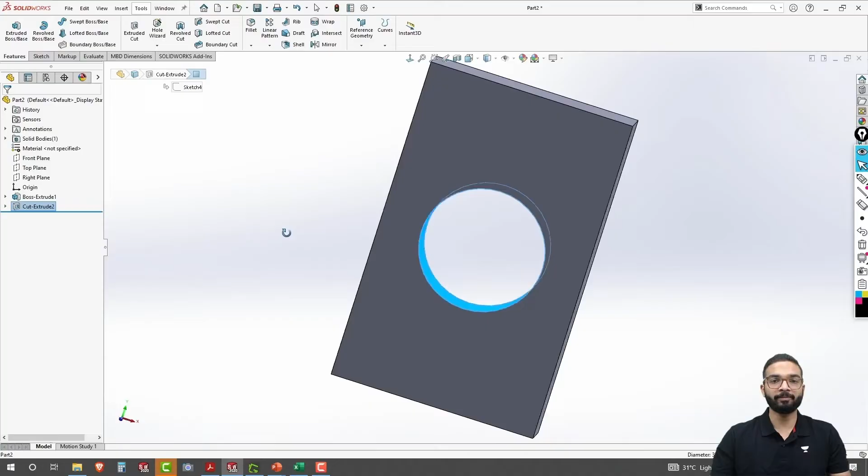In this video, we would be taking a new exercise. This exercise is a very interesting one. Let's move forward and take a look at our 3D model for this exercise. You can see here that we would be modeling this intake manifold used in automobiles. Let's not waste any time and get started with SolidWorks.

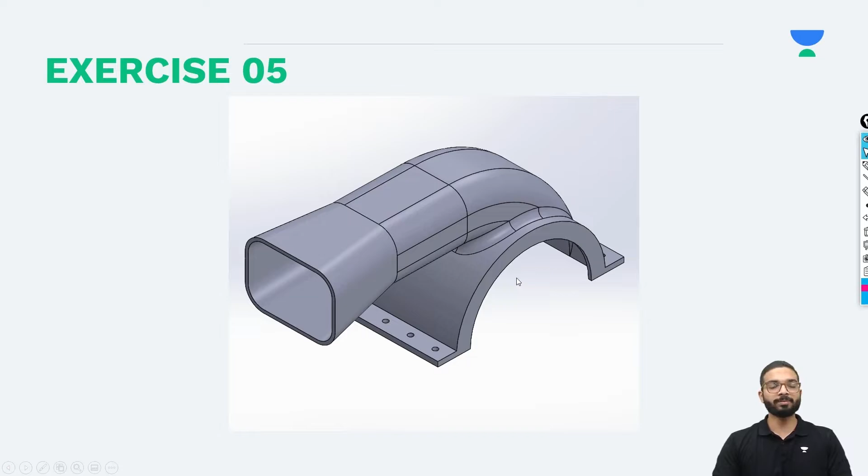We will launch SolidWorks and begin with our modeling. For this, first I would be sketching on the right plane. I will click on the right plane and select Sketch. Next, I would be first creating a circular profile from the origin, like this. I will give this circle a diameter of 120 millimeters. I will enter 120 and then press the Enter key on my keyboard.

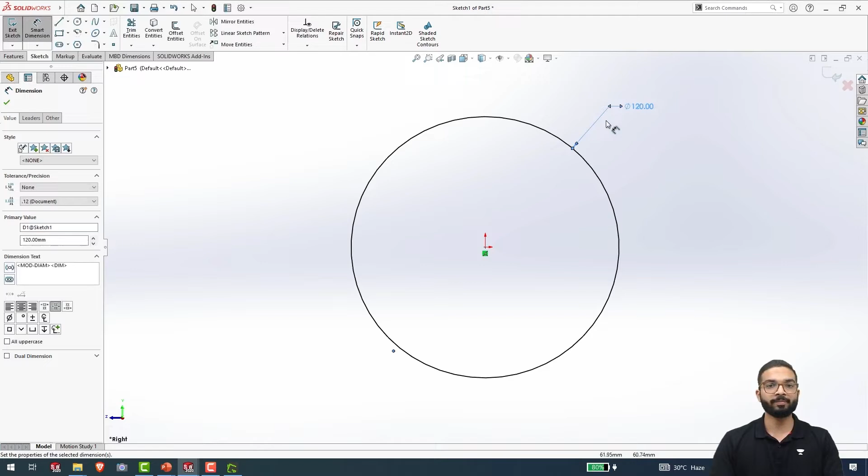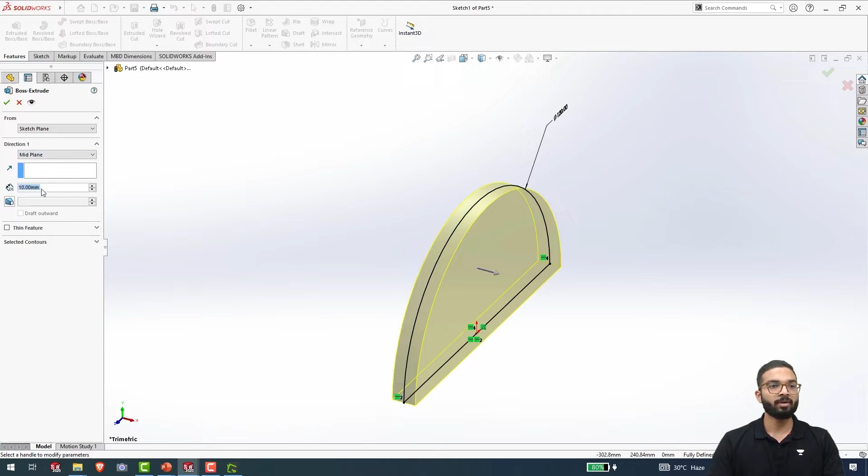Next, I will create a line horizontally connecting these two reference points over here and then press Escape. I will trim off the bottom portion of the circle because we want only this part to be extruded. Once we have done this, we will go to Features and select Extruded Boss Base. We will now extrude this profile from the mid plane for a distance of 80 millimeters. We will click on OK and you can see that our surface has been generated. This is our first feature.

Now again I will go to the right plane over here and sketch on it again. I will press Ctrl 8 and then set it normal to the screen. Next, again here I would be creating a new circle, going to Smart Dimensions and then selecting this circle and give it a dimension of 97.5 millimeters. I will press the Enter key and add my dimension. Once I have defined this circle, I will press Ctrl Q and then exit the sketch. Why this circle was drawn, I will show you in a while.

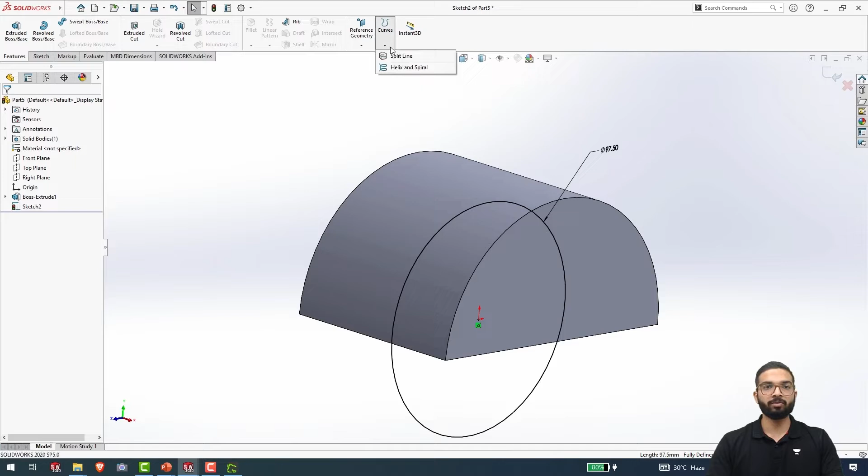From Features, we will go to the drop down of Curves. We will first exit the sketch mode by pressing Ctrl Q. We will go to Features and from the drop down of Curves, we will select Split Line. And from these options of split, we will select Projection. Now here it is asking what line do I want. This is the line or sketch that I want, and here it is asking what face do I want to split.

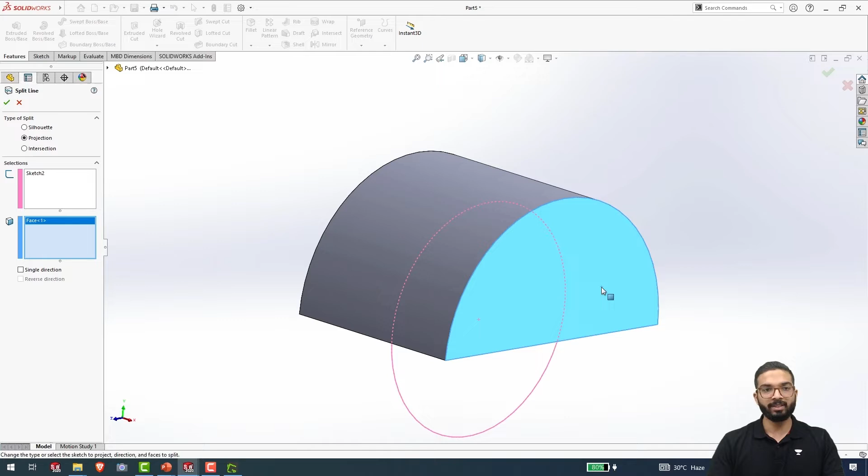I will say this face, and when I click on OK, you can see that this face has been split about the line I showed you before. You can see that now these two are different faces. Why we did this, I will show you at the end of our 3D modeling. But now let's move forward and create the intake manifold.

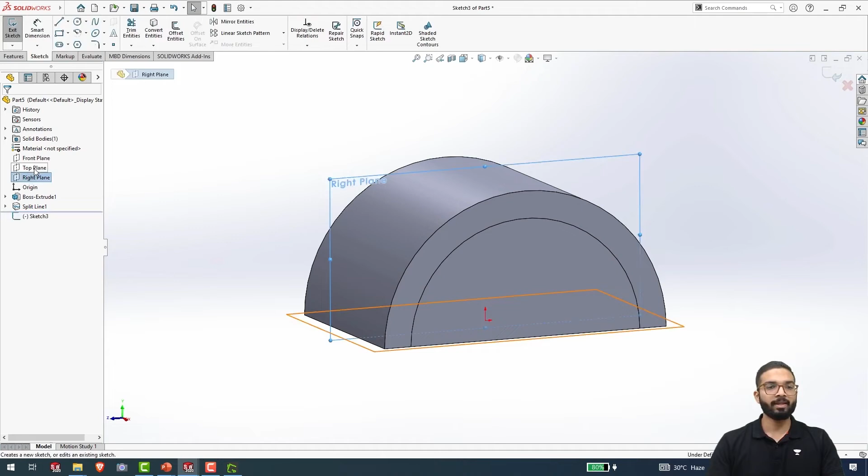Now I will again select the right plane and then sketch on it. I will press Ctrl 8 and then set it normal to our screens. From here, I will create a 3-point arc like this, starting from this point over here. Second point would be there and my third point would be somewhere over here. Next, I will give this arc a radius of 100 millimeters like this, and then by pressing Escape, I will select this point, press Ctrl key and select this edge over here and say Make Coincident.

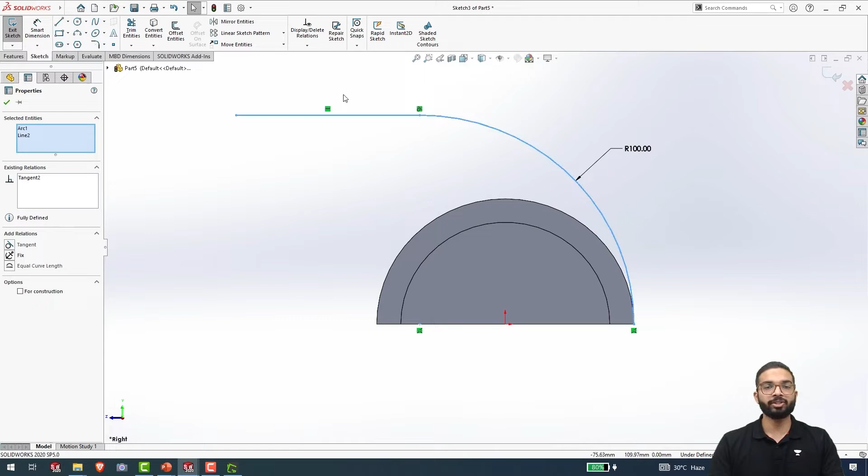Once I have done this, you can see that my arc is now defined. Now I will select the line command and create a horizontal line and then press Escape. I will select both of these entities using the box selection and then say Make Tangent. Once I have done this, I will specify this endpoint over here from our center, which is at a distance of 81.5. Once I have entered this and defined the sketch completely, I will now press Ctrl Q and exit the sketch and also rebuild my part.

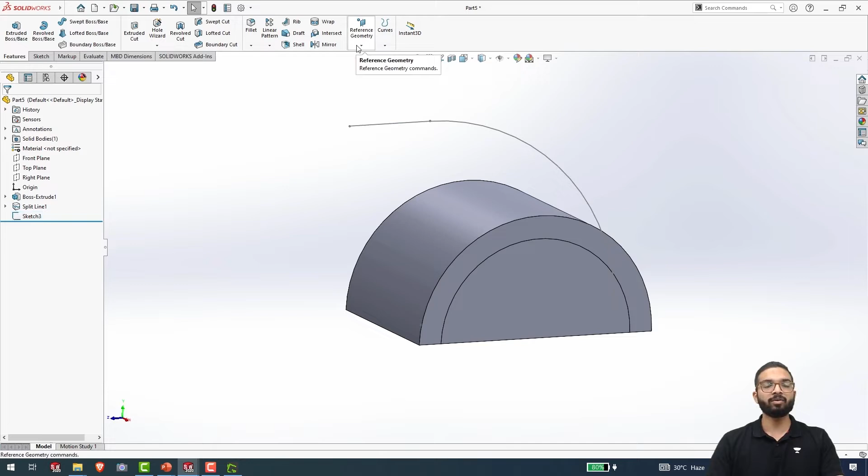For the next step, I will create a plane at this intersection using this line as my reference. For that, I will go to the drop down of Reference Geometry and select Plane from here. My first reference would be this line and my second reference would be this point over here. You can see that the preview of the plane is being shown. I will click on OK and then generate this plane.

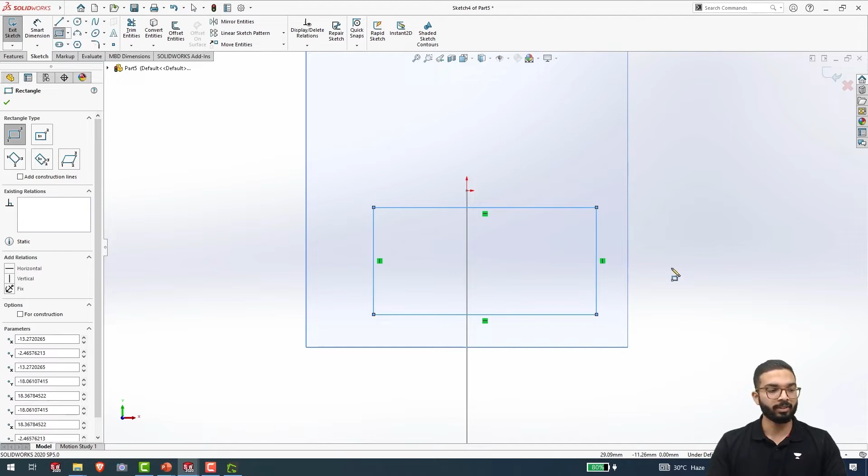Now I will select this plane and start sketching on it. I will press Ctrl 8 and set it normal to my screens. I will zoom in a bit over here, select a corner rectangle and create a corner rectangle over here. Now I will give this the dimensions. The dimensions for this line are 57.5. I will enter it and then give this dimension of the rectangle as 42 millimeters.

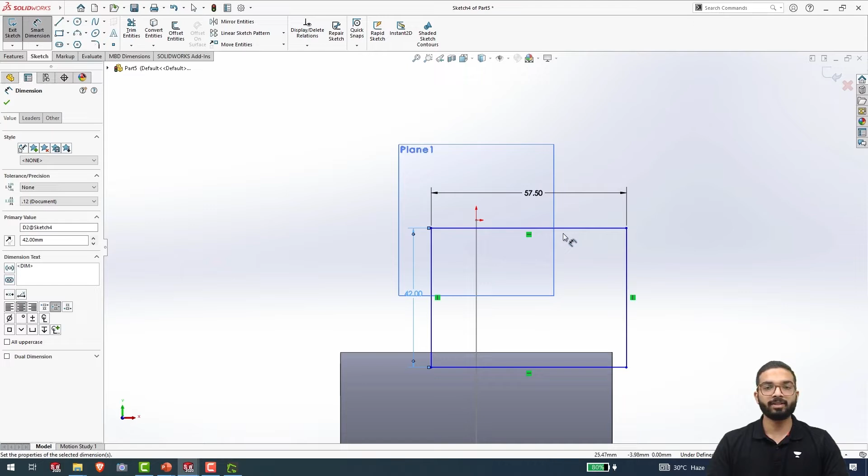I will press Enter and you can see that my dimensions have been added. Now I just have to simply define the sketch. I will press Escape, exit the command. Now I will right click on this line, select Midpoint, press Ctrl and then select the origin over here, and here I will say Make Pierce.

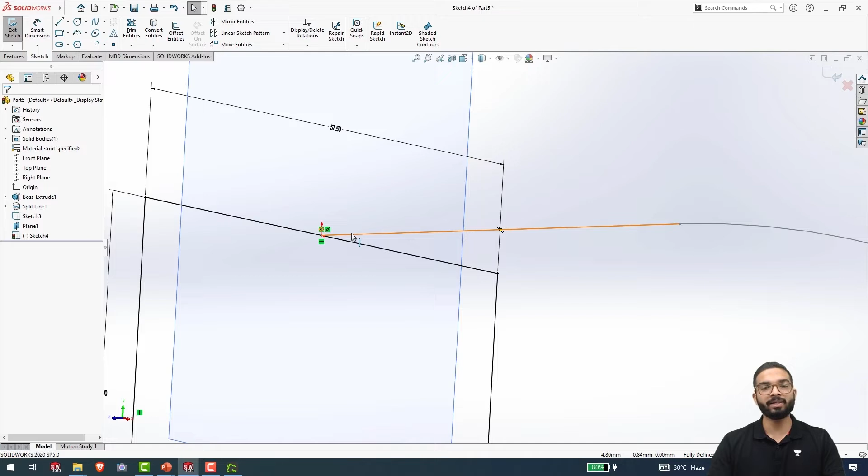You can see after adding this sketch relation, my sketch is now completely defined. What it did over here is that it pierced the center point of this line on this sketch, on this line that we had created in the previous sketch. You press Ctrl 8 and you can see that this is how my profile is looking.

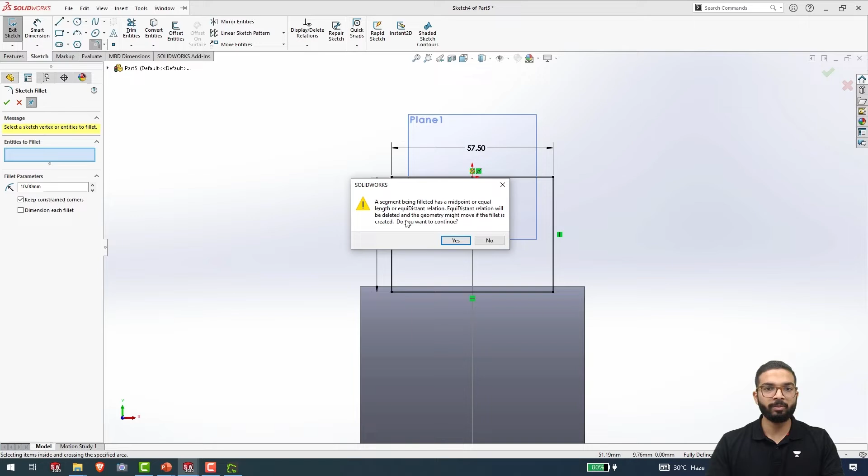Now I will go to the sketch fillet over here, and then by using box select I will select all of these. You can see that it is showing me a message: a segment being filleted has a midpoint or equidistant relation. The equidistant relation will be deleted and the geometry moved if the fillet is created. We will say yes, again we will say yes, and you can see that it has selected all the edges where a fillet would be applied.

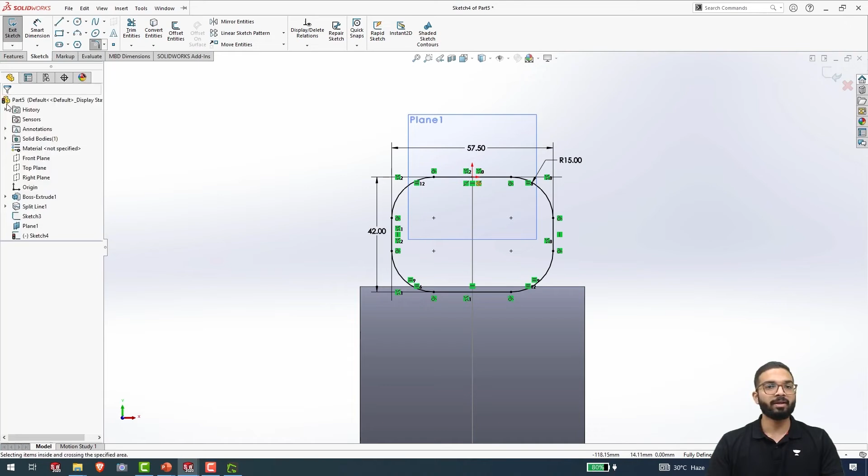Here I will enter the value of my fillet, that is 15 millimeters. I will enter 15 and then click on OK. You can see that my fillets have been added. I will click on OK and then press Ctrl Q again in order to exit the sketch mode and rebuild our part. Once this has been done, I will show you how to use the sweep feature.

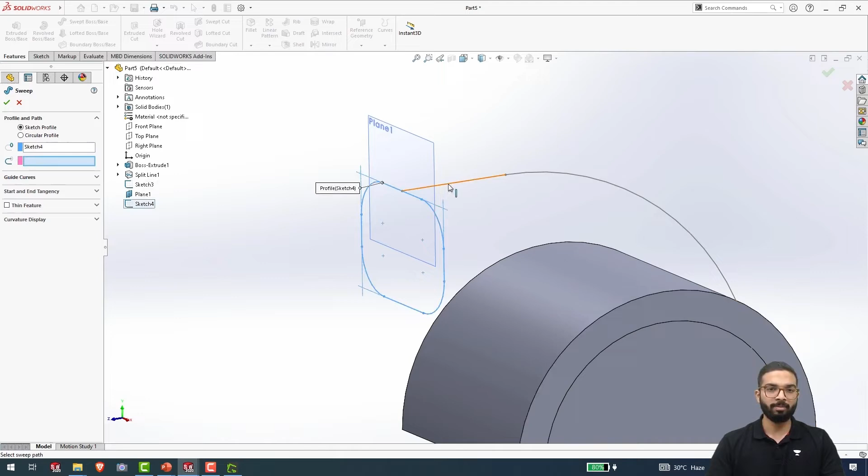I will select swept boss base from here, and the first input that we have to give is our profile. We can select it directly from here. You can see that the sketch has been added, or else I can clear selection and then select the sketch from the drop down. Next it is asking for my path. I will select this. You can see it is showing us a preview of how our sweep would look. Now that we are okay with this sweep, we will press OK and generate this sweep.

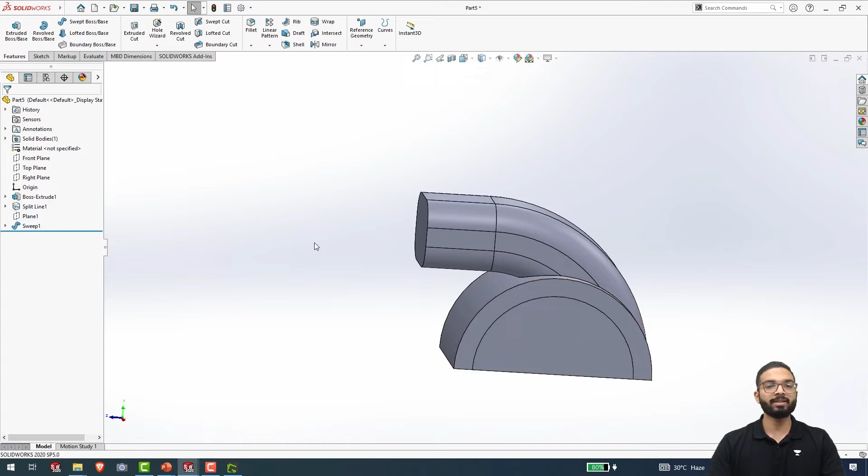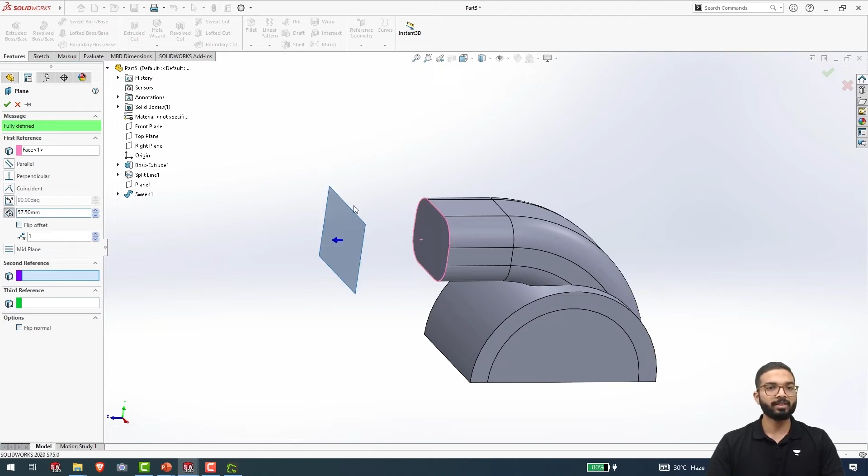Next I will create this front part over here. Before moving, we will hide this plane as it no longer serves any purpose. Now I will create a new plane offset from this face. I will go to plane and you can see that as my face was already selected, it created a plane at a distance of 10 millimeters from it, but we want it at a distance of 57.5 millimeters. You can see the preview of the plane. I will click on OK and generate this plane.

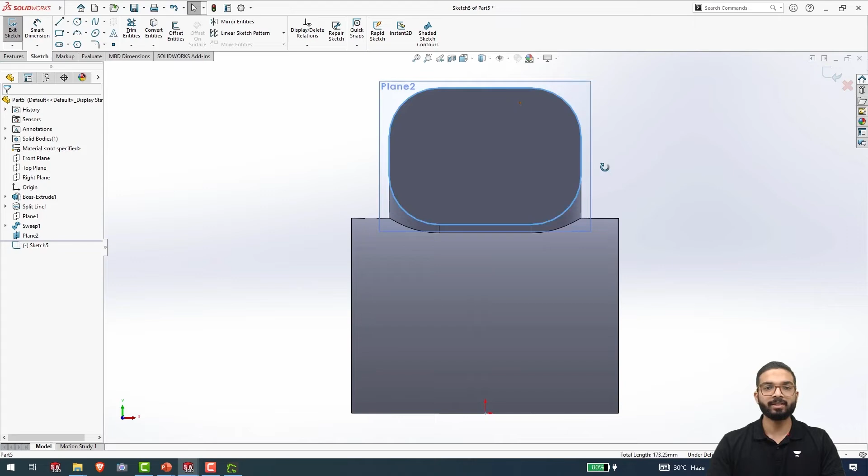Now I will click on this plane and go to the sketch mode. I will press Ctrl 8 to set it normal to our screen. I will right click on this edge and select tangency. You can see that all the edges that were tangent have been selected. I will go to convert entities and you can see that this sketch has been converted onto this plane. Now we will select this whole sketch, right click on it and select chain. It has selected all of these lines and curves.

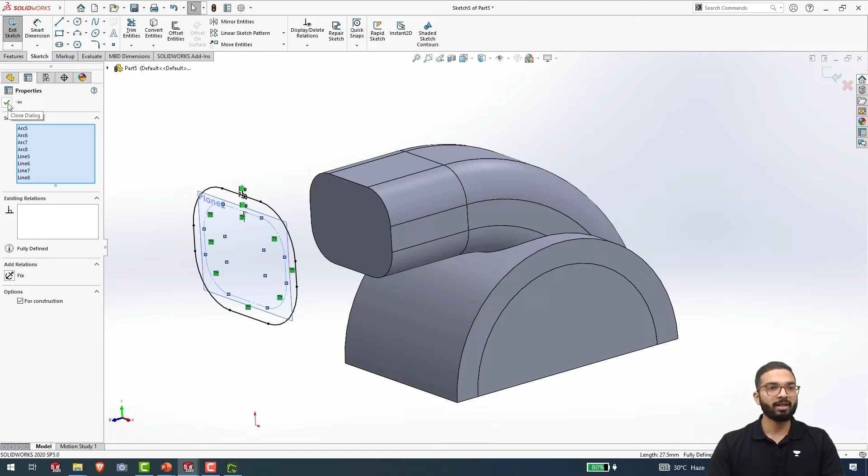I will say offset entities and offset these entities at a distance of 7.5 millimeters in the outside direction. Once this is done, I will press OK and you can see that my offset has been created. Now we have to select the sketch, right click on it, say select chain and then make it for construction, as we don't want it included in our 3D model. I will click on OK and you can see my sketches are ready.

Here I will show you how to use Loft. First I have to exit the sketch mode by pressing Ctrl Q. I will go to features and select lofted boss base. Once we are in the menu, we have to specify the sketches from where the loft will be generated. You can select the sketch from here or from the screen directly. If I select the sketch from here directly, you can see that sketch 5 has been added.

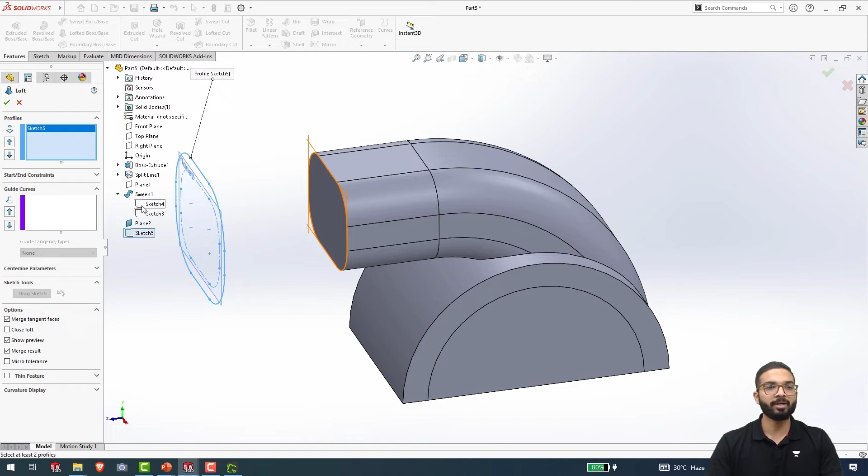Next, we will add the previous sketch that we had created. It is in the drop down of the sweep. I will select that sketch, and you can see that the loft is being generated. But if you closely take a look at it, it is not proper. For that, you need to move this point from there to here. You can see that now the loft that is generated is consistent and does not have any errors like we saw previously.

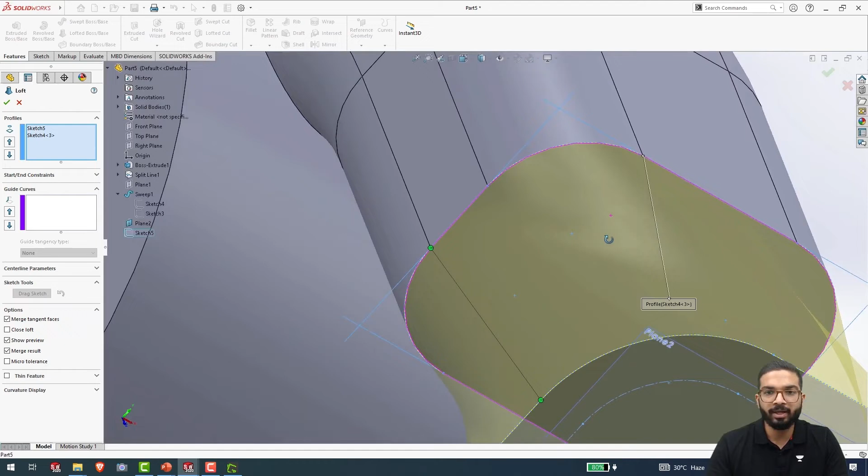But even if you zoom over here, you can see that it is now twisted as well. You have to look closely and align these points so that they are in front of each other. You can see here, now that we have set this line as a straight line, the preview of the loft is now consistent and there is no twisting on this loft.

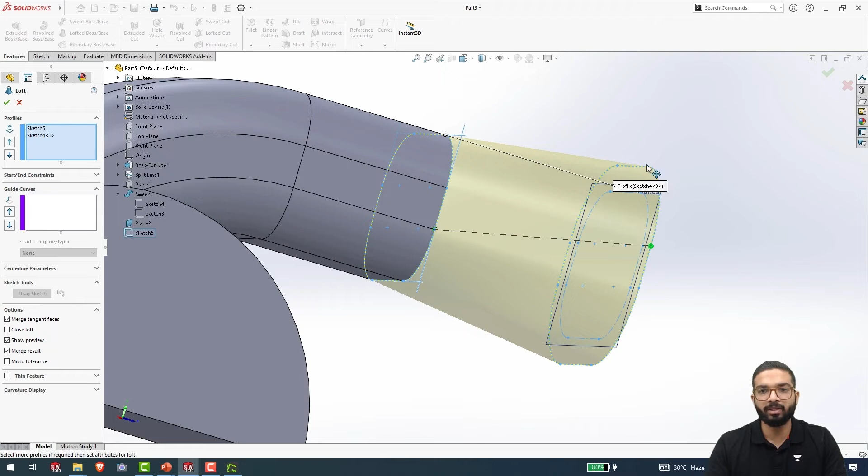I will show you what would have happened if I had placed this line somewhere here. Let's say over here on the top. I will make it a bit extreme. I will click on OK, and you can see that this is how my loft has been generated. But this is not the way we wanted a loft to be generated. You can see, as we had selected this point and this point, it has generated a loft in this direction.

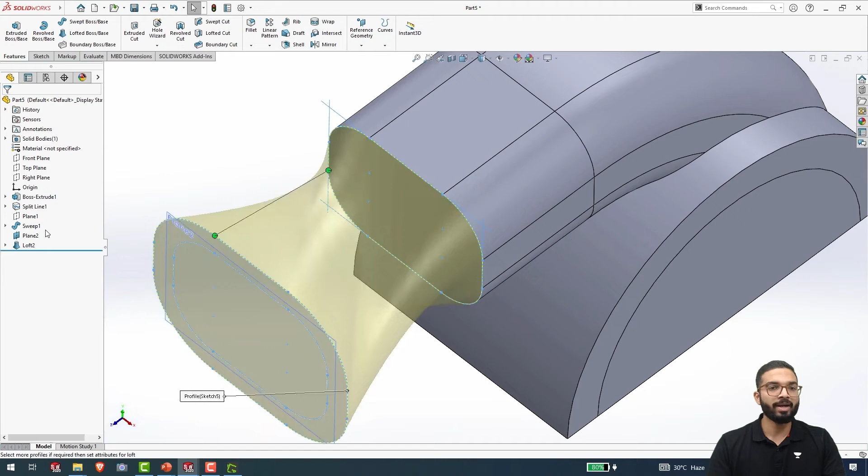Now I will again click on loft and go to edit feature, and again I will rotate my part and move this point back to over here. As I had told you, you need to make sure that these points are in front of each other or in a straight line at least. You need to be careful while selecting these lines.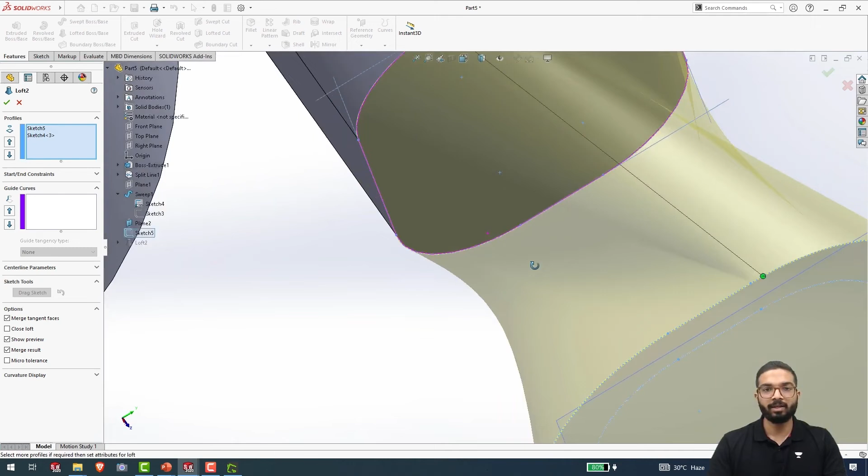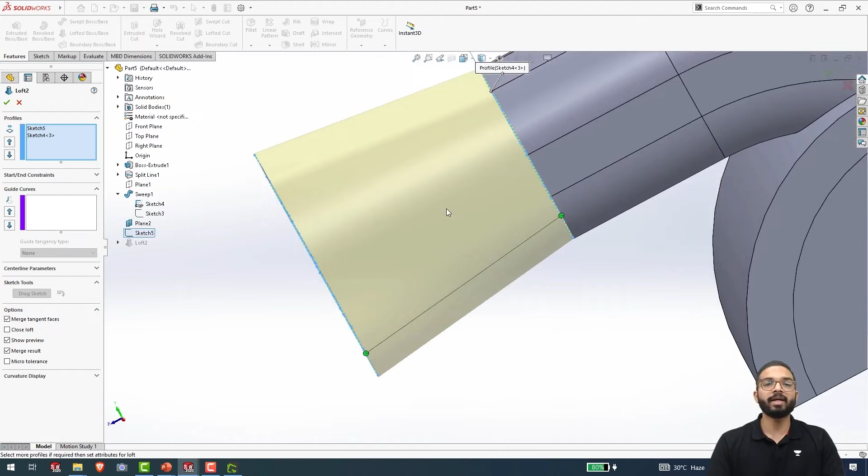I will zoom in over here, select this point and then move it onto here. It is not taking the selection. Let's see why. We will now carefully select this point and then shift it to this point over here. You can see that it is not yet aligned. Now if I move my point over here, you can see that now my loft generated is a straight one and the way we wanted it. I will click on OK, and here you can see that my loft has been generated.

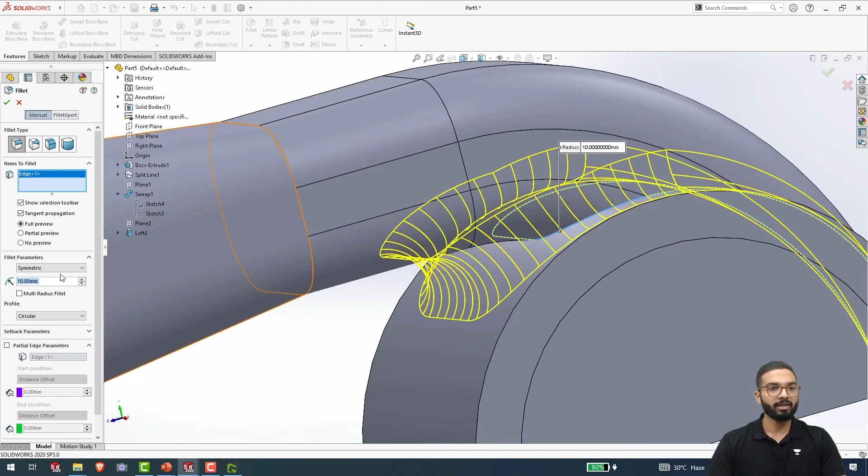This plane no longer serves a purpose, so I will select it and then hide it. I will press Ctrl 7 in order to set it isometric. Now you can see that our component is almost ready, but there are a few things that need to be done first. Now I will add a fillet over here. I will go to fillets and select the edge about which my fillet would be generated. I will select this edge over here and give it a value of 10 mm. I will click on OK and generate my fillet.

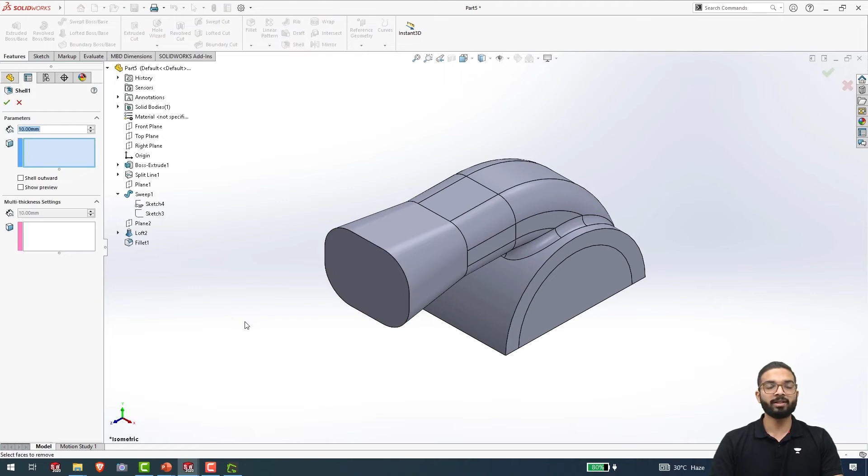Once we have generated our fillet, we will again set it to isometric mode and then create a shell. Here I will show you why I had split this face about this line. I will select shell and specify the faces from where the shell should be created. I will select this face over here that I had selected by splitting it, and this bottom face. For the thickness of the shell, I will enter 2.5. If I show the preview by ticking this, you can see that our shell is being created this way. I will press OK and generate my shell.

Now you can see over here, why did I split this face? Because I wanted this extra portion over here to be present. If I had not split my face and gave this whole face as the shell, it would have generated a shell from this edge over here, leaving a thickness of 2.5. For this purpose, we had to split this face. I hope you understood how we split a face, and you can use it later on whenever needed.

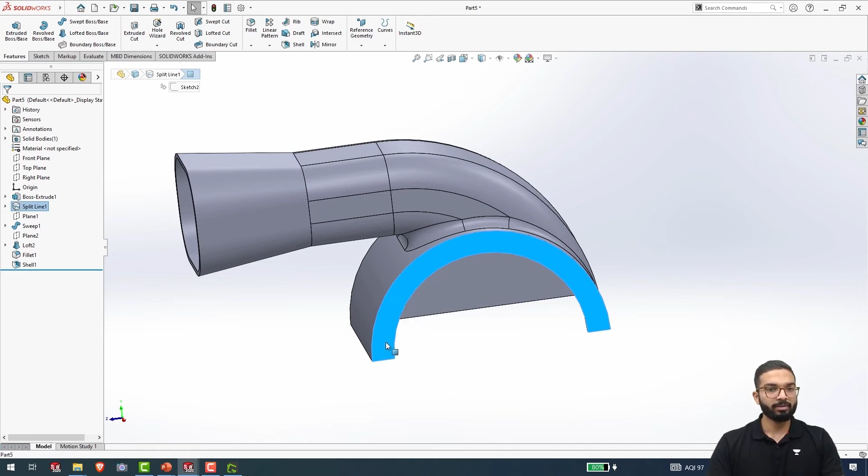Now we have to create these edges over here that would be used for mounting and would have holes. For that, I will select this face, go to the sketch mode, press Ctrl 8 and then start sketching on it. From here I will first simply create a corner rectangle like this. Now I will start dimensioning it. The height of my rectangle is 4 millimeters and it is at a distance from the center of 75 millimeters. So I will select them both and enter 75.

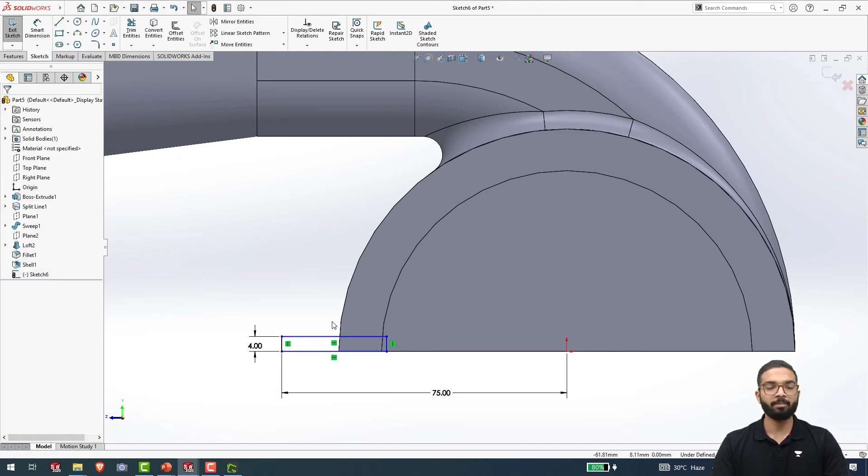Once I have done this, I will press escape, exit the Smart Dimension command, select this curve over here and then go to convert entities. Once I have converted the entities, you can see that this curve is now in my sketch. Now I will go to trim entities and trim off all the entities that are no longer required. I will press escape and you can see that now my sketch is completely defined. I will go to features.

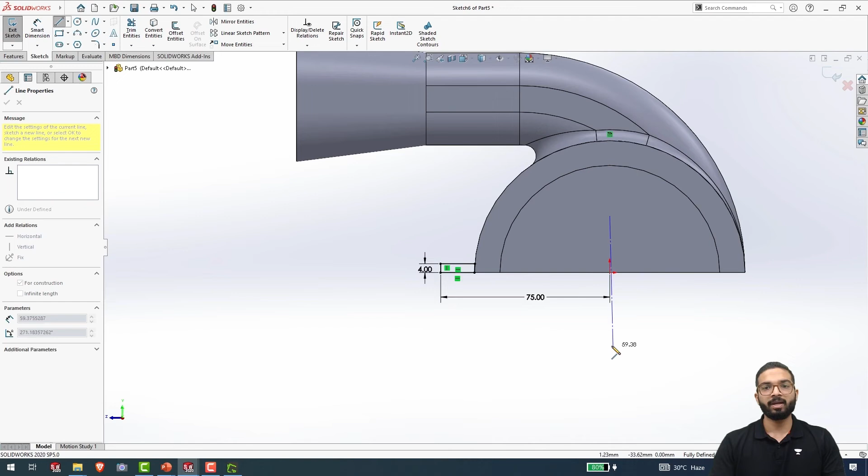Before going to features, what we can do is create both of these edges in one go. I will again go to sketch and from the line command I will select a center line. I will create a center line from the origin over here, press escape. If I zoom in and go to mirror entities, first I will select all the entities that I want to mirror using box selection. Now I won't move my mouse and will press the right mouse button. Next I will select the center line about which my mirror is supposed to be created and again press the right mouse button. Here you can see that both sides have been created.

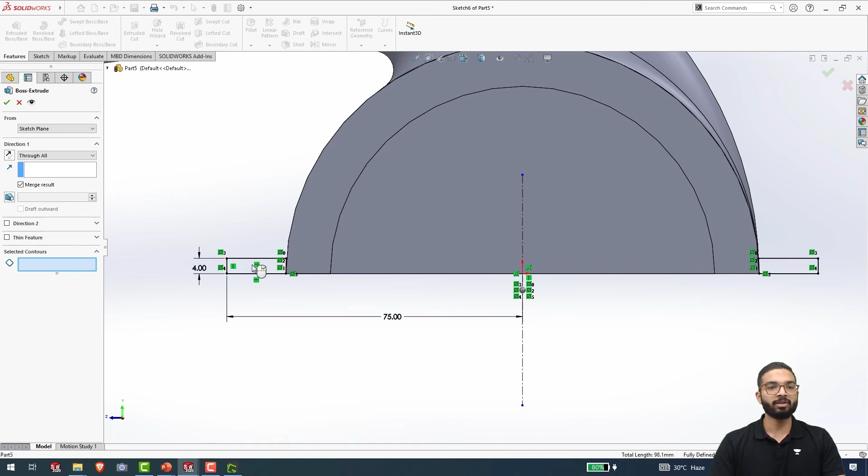Now we can go to features, select extruded boss base and from the options over here we will say through all. Here it is asking us for the contours that we need to extrude. I will say this one and then this one.

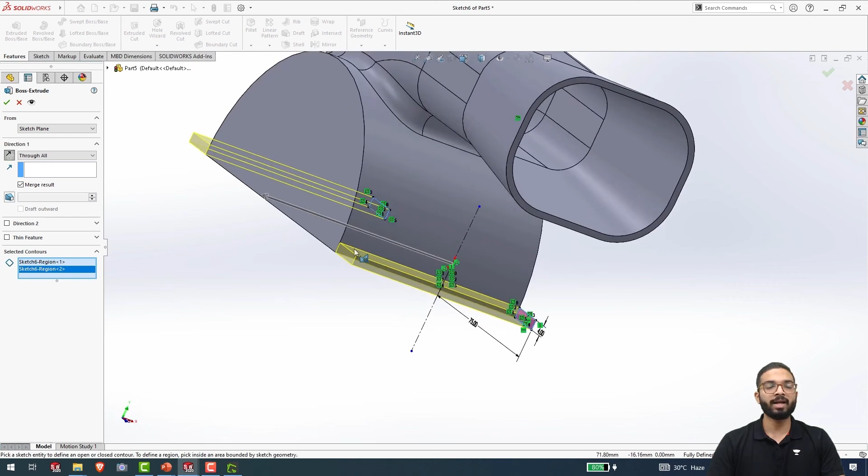Once we've done this, we will check if all our input parameters are correct. Here you can notice that the direction of extrusion is in this side and there is no material over here, and we have provided Through All condition. For that I will simply switch the direction and you can see here that it is showing us a preview and the extrusion is taking place up to this surface over here. I will click on OK and then create this feature.

One important point to note over here, I will show you by again editing this feature, is that you need to make sure that Merge Results is on. I'll click on OK and then generate this feature. Now we are almost ready. What we have to do is that we have to add holes on this face over here.

For that we will select the Hole Wizard command. Now from the hole type I will select a normal hole. The standard is ANSI Metric, the type of holes is drill sizes and the size of the hole over here is 4 millimeters. I will scroll up and then select 4 millimeters from the menu. Here we have 4 millimeter hole. Now the end condition would be Through All.

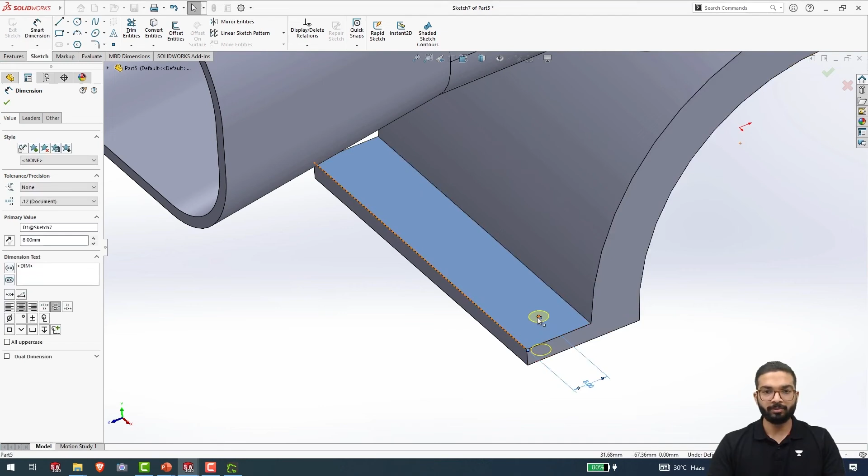Let's move to position our hole. We will specify this face as the creation of my hole and then first arbitrarily place my hole. We will go into Smart Dimensions and then specify the dimensions of our center of the hole from the edges. That is, from here it will be 8 millimeters and from this edge over here, and I will zoom in, select the center properly.

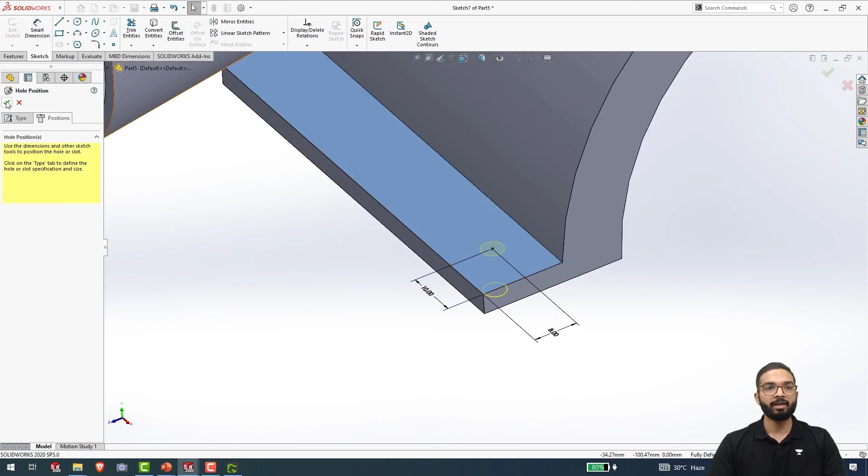Here we have exited the Smart Dimensions command. We'll again get back into it by using the right mouse button and dragging our mouse upwards. I will select this center point and this edge over here and give it a distance of 10 millimeters. Once my hole is fully defined, I will click on OK. Again I will click on OK and generate this hole.

Once this hole is created, now we have to simply pattern it. We will go and select Linear Pattern. Specify the direction of your pattern, that is in this direction. The spacing for our instances would be 20 millimeters and the number of instances created would be 4. You can see the preview over here. I will click on OK and generate my pattern.

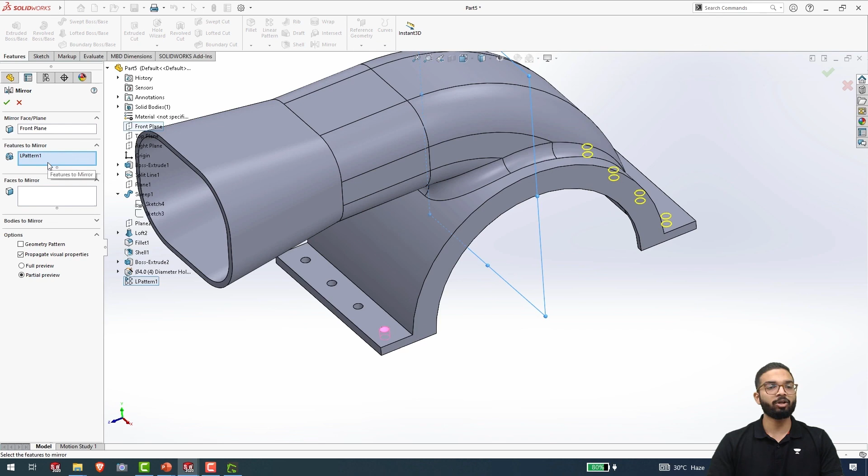Now we will simply mirror this pattern on the other side. For that again we will go to the drop down, select Mirror and then specify the plane about which the mirror is supposed to be taken. I will say Front Plane. It has automatically selected the feature to be mirrored as my linear pattern. I will click on OK and you can see here that the mirror of the pattern has been created on this side as well.

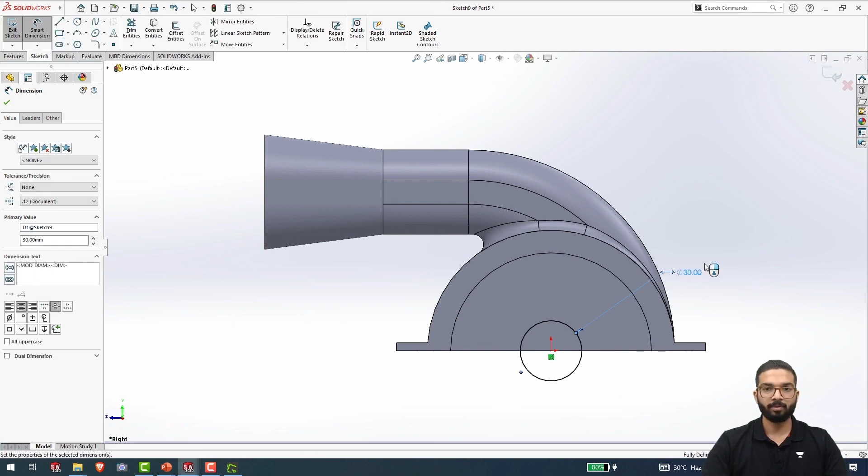Now one small thing left to be done is that we have to create a small opening over here. I will show you how. I will again sketch on the right plane. Once I am into the sketch mode, I will press Ctrl 8, and from the center I will be creating a circle like this. I will go into the Smart Dimensions command and give it a dimension of 30 millimeters. Once I have added the dimension, I will go to Features, select Extruded Cut, and from here I will say Through All Both. Now I will simply click on OK and generate my cut.

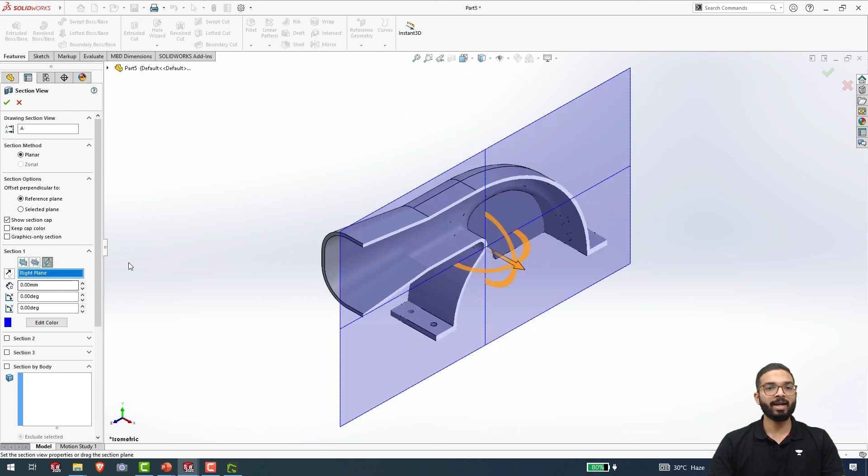You can see now that we have modeled everything, our intake manifold is ready. I will press Ctrl 7 and set it normal. What I can do over here is show you a sectional view of how the inside has been generated. I will select Section and then specify Right Plane as my sectional plane. I will click on OK and then press spacebar and see from this direction over here. You can see this is how our intake manifold has been created.

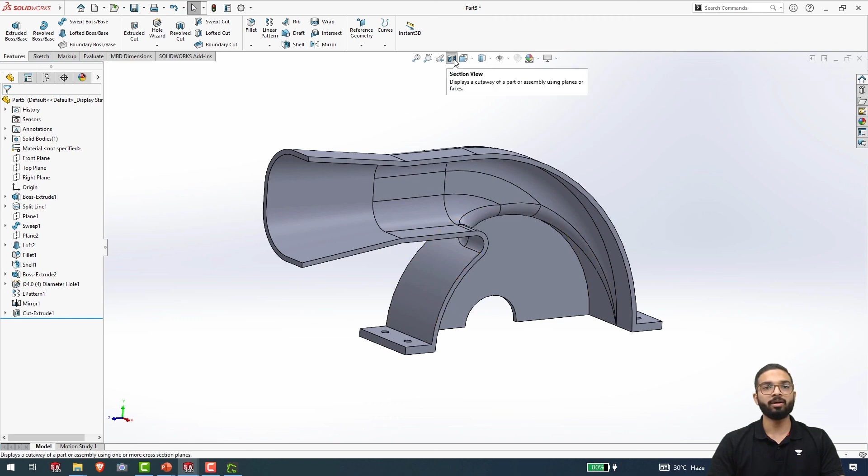We created this profile using a sweep, this one using a loft, and these were simply created by using extrusions and cut extrudes. The inside was created by using the Shell command. I hope it was very clear why we split that face in the first part of the video. Also, I hope that the complete modeling process for the intake manifold was understood by you all. I hope you practice this on your own and get a good hang of it.